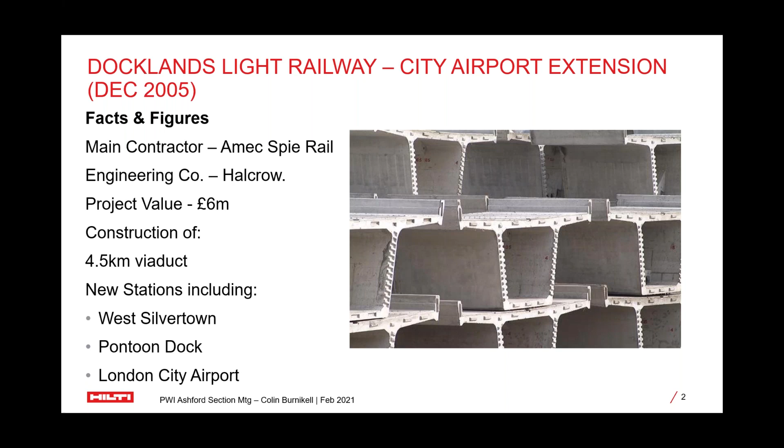So the site was in Dock Road, which is in Canning Town. So if anyone's familiar with East London, you'll probably recognise some of the landscape there. But this wasn't just purely an office setup, and in that image, in the background, you can see those blue buildings. That was the actual office, but also they had a factory set up on site. And this enabled them to manufacture the various concrete products that would be required for this particular project, the primary one being, obviously, the viaduct.

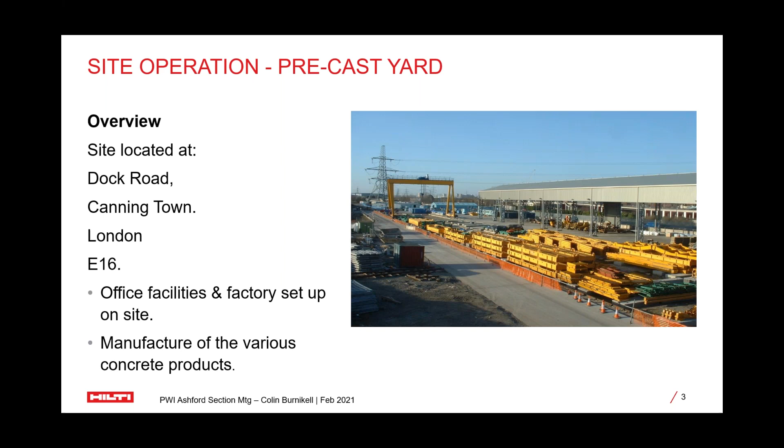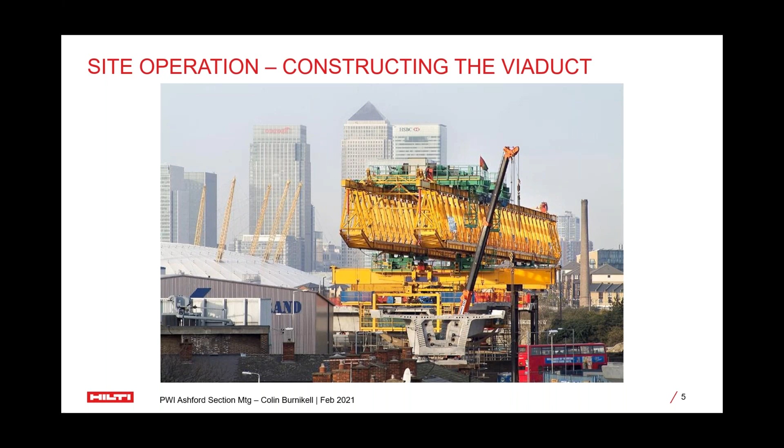So if we have a look at the civil engineering element, the construction of the viaduct, as I said earlier, the viaduct pieces were made on site, and then they were moved and transported around site using the following methods. So you can see the image on the left-hand side.

The viaduct, once the elements were constructed, were left to cure, and once they were fully cured, they could then be assembled. And what was interesting to note was the alignment. So as each segment went along the route, it was aligned specifically to the previous part of the viaduct, therefore ensuring it was an exact fit.

The other thing to bear in mind, of course, as well, was services. Now, in the past, you may have seen bridges with services either hanging off the side or fastened to the side. But in this instance, it was decided that the cables and services would actually be within the structure itself. And that image on the right-hand side, you can see some of the cable penetrations actually in situ there.

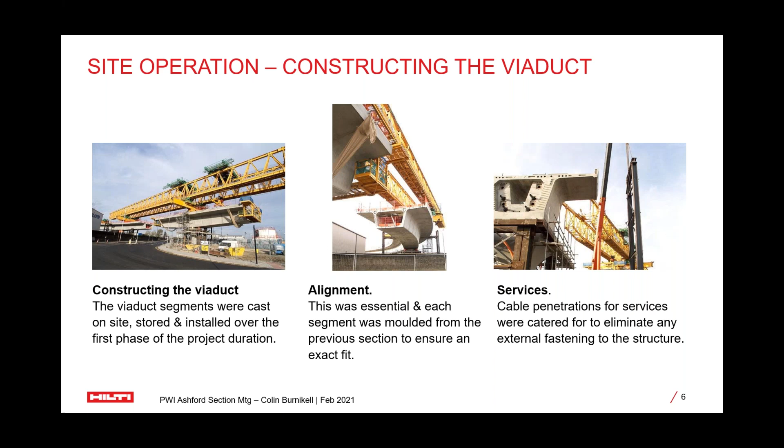So this is the main entrance to the site. This was the first part of the viaduct as it was coming off the transition slab. And again, you can see the Portakabins there in the background.

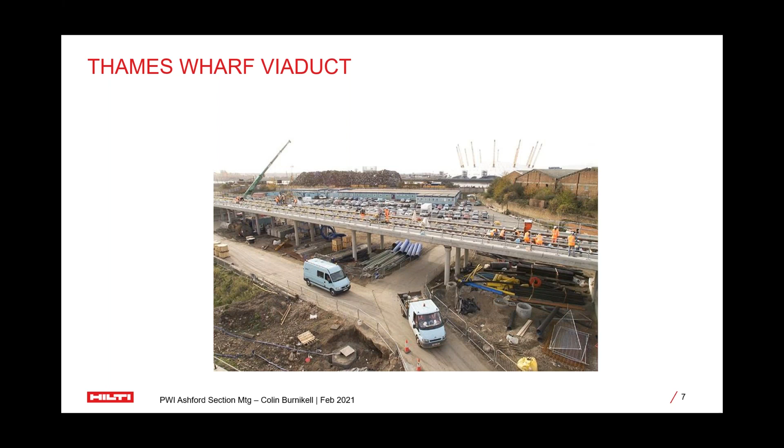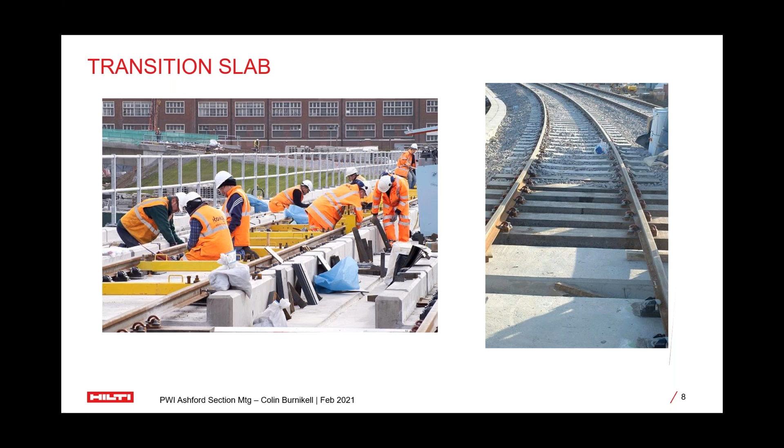So the transition slab. So the route came out of Canning Town. So the image on the left where you see the green netting, as the route swung round on that curve, obviously that's your traditional ballasted track, and then it transitioned into the poured concrete slab. And there on the image on the right hand side, you can see there's some timber sleepers, and then ultimately the concrete slab itself.

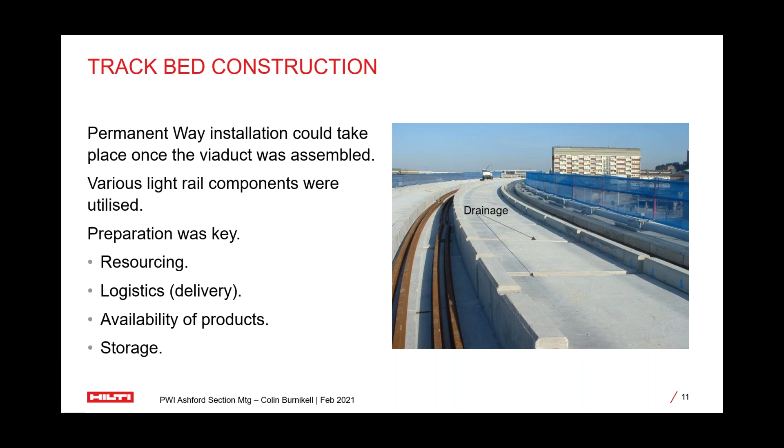So for preparing the track bed, a grout pad was going to be used, and you'll see more of that in a while. But to ensure there was an excellent bond between the concrete and the grout, obviously the concrete base had to be scabbled. And this, although quite a manual process, was quite efficient and very effective at what it was designed to do.

And if you look at the chap standing at the back there, he has a shroud around, if you like, the footprint of where the grout pad's going to go. And this enabled it to contain the precise locations for these base plates where the grout pads are going to be.

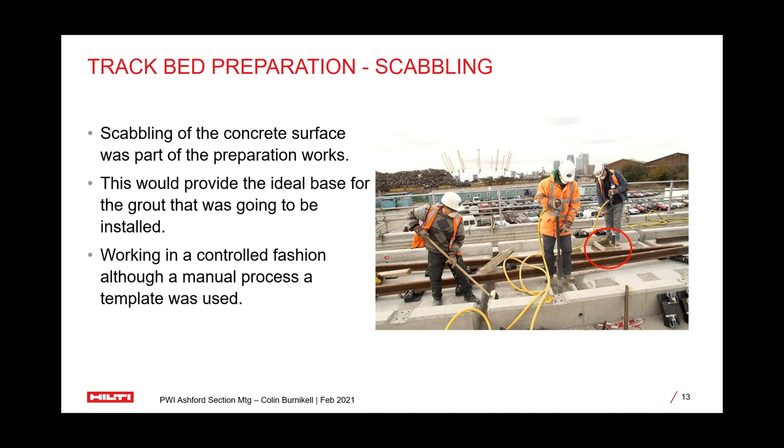So now if we look at the track bed, we now have a scabbled viaduct where the base plates are going to sit. And this is a curve just going out on the first part of the route itself. On the right-hand side of the picture, you can see the other road as well. So this is obviously a twin track.

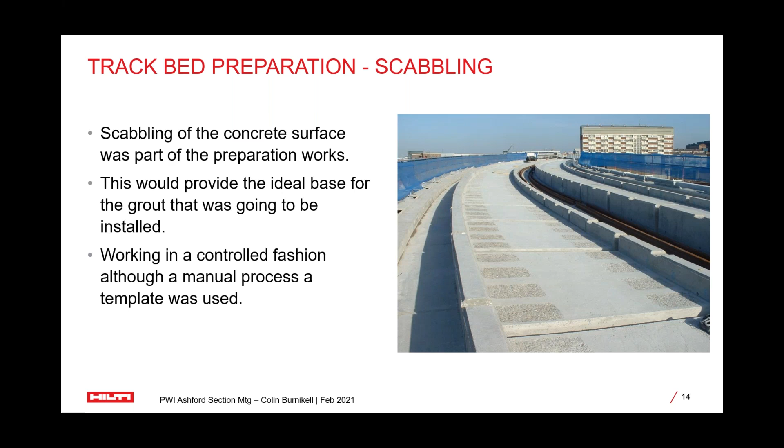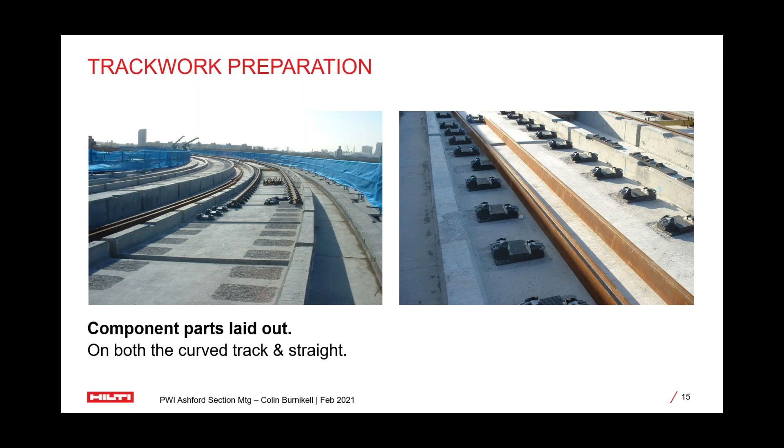So the next part of the project was obviously to start laying out the component parts. So as you can see here, we've got the track work laid out, and we have the appropriate base plates. And on the right-hand side, that's the same situation using standard 80-pound rail on the Vipa base plates. Then the gauge was set up, so obviously it was all aligned correctly, and then the next phase of the construction could begin.

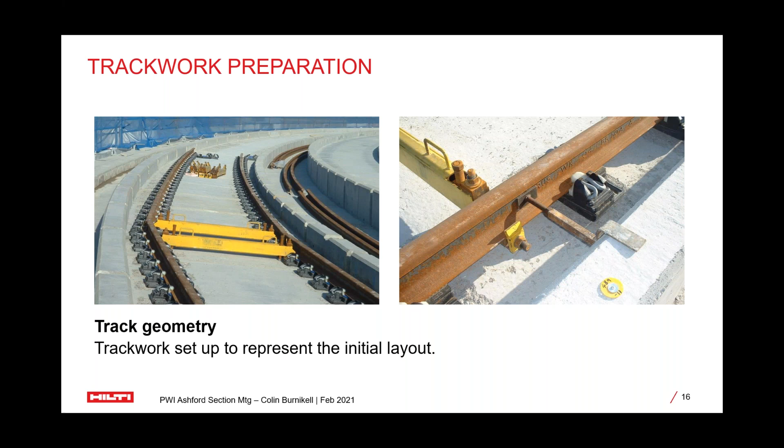For this particular project, for the plain line, the Vipa base plate was the base plate of choice. This was specified by Halcrow, and as you can see in the image, it's pure and simple, a 2-hole base plate. It also incorporates the fast clip, which obviously makes removal of the base plate, should it be needed, quite easy to achieve. And the middle image clearly shows you the base plates, simply suspended off the rail, how they'll overlie the scabbled concrete where the grout bed is going to go.

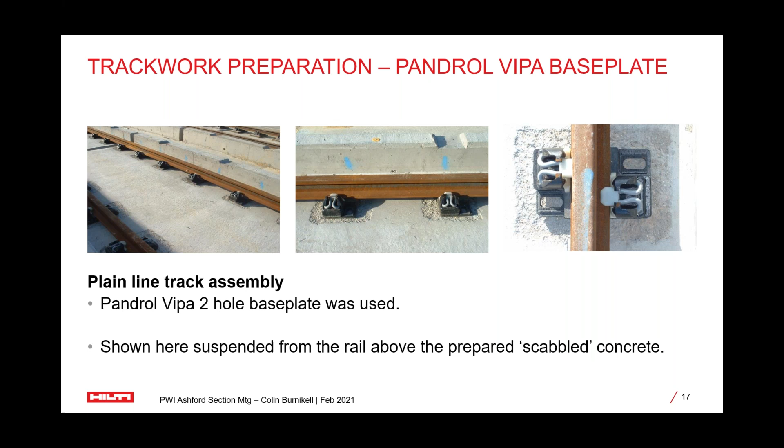So we've now obviously established that the track work was in situ, but a number of things had gone on in the past prior to this, and that was to ensure what anchor or fastening was going to be used. So there were various tests and trials that went on prior to any installation work, and this goes back probably 3, 4, 5 months prior to the track work being constructed. And there was some criteria.

The anchors had to achieve 70 kilonewtons, and there was a wide array of different fixings that were going to be tested. It was decided a chemical anchor was the preferred choice, and a male anchor at that, not a female, not a socket. The initial trials were quite wide and varying, if I'm honest, and a number of the chemical anchors actually failed, and it was the bond between the anchor and the concrete that had failed, so it just literally popped out.

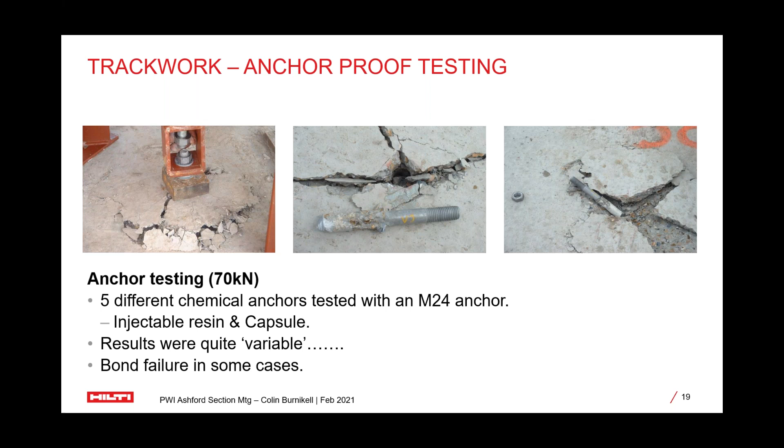As part of those trials, we, as in Hilti, were also involved, and we had 2 chemical anchors that were being tested. One was a resin capsule, and the other one was our injectable resin, our RE500, which is quite unique in itself, and it has a pinkish colour. So from an installation point of view, you can see if our resin has been used, but equally you can see at the top of the anchor, you want to make sure you've got enough resin in the hole.

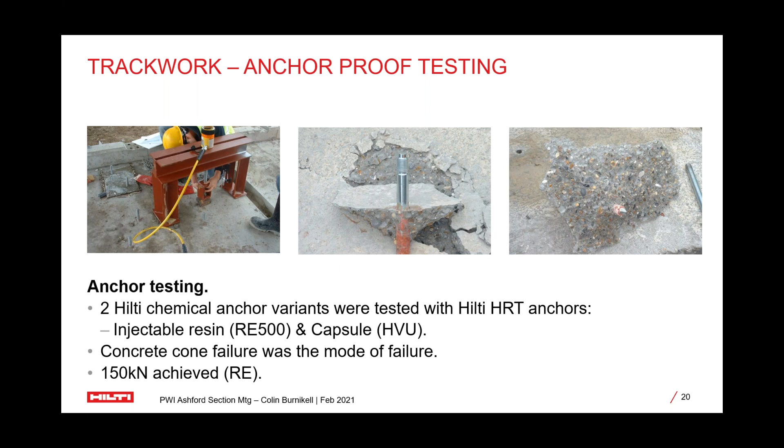And when this was tested, we found that it was actually the concrete that was failing, not the anchor. And as you can see there, we doubled the loads that were expected, with 150 kilonewtons in shear. Now, we were also asked at the same time, what about potential workmanship issues? So as part of this testing, we drilled out some holes and filled them with standing water.

So if the construction work was going on in the winter months, which it was, and there was a sudden downpour and the holes got full with rainwater, what would be the impact of using our resin in this particular scenario? So we drilled a number of 28mm holes. We installed our RE500 resin, and then we placed our M24 anchors. And once the resin had cured, we went back and tested these, and once again they passed the minimum 70 kilonewton load, and the image on the right gives you an example.

So we were fairly confident that this particular resin would be suitable because it's actually used in underwater applications as well. And this was one of the reasons why both the designer and the construction organisation, AMEC, were keen not only to use this, but to have some sort of documented evidence to prove the suitability of this anchor.

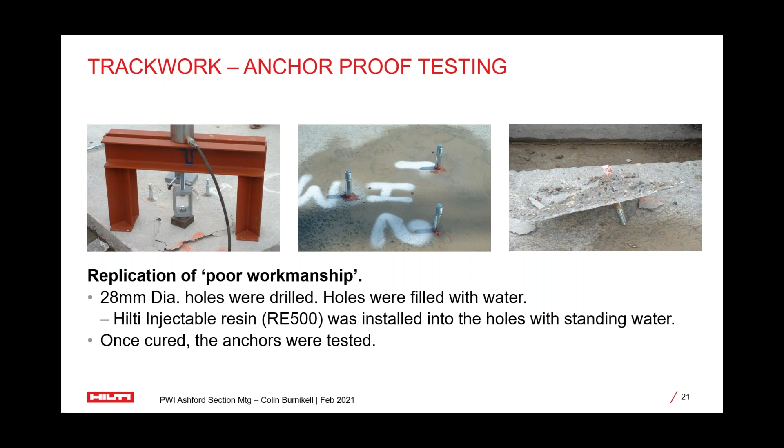So to supplement the tests we've done on site, we also provided some of our internal test data, and a fair challenge came back: do you have any external independent test reports? So we had some Technical University Munich reports specifically on our resin and our anchors, and this was overseen by Josef Eisenmann. So if anyone is familiar with this chap, I think he's since retired, but he was quite a recognised name within the industry.

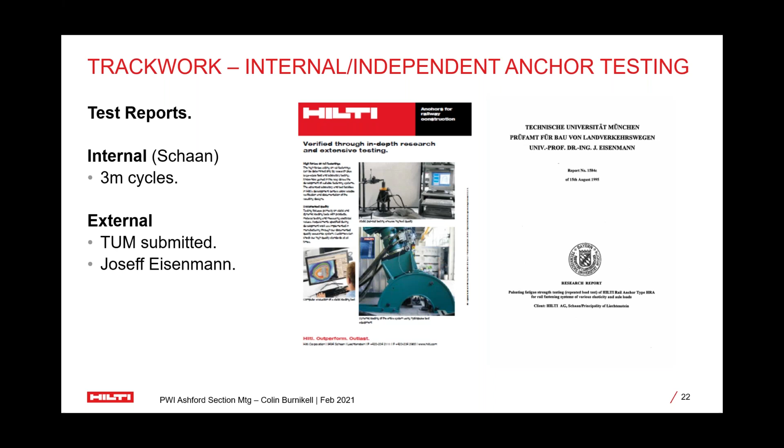So that was all submitted, and the anchor part of it was firmed up and confirmed that the Hilti RE500 would indeed be the preferred resin for this particular extension. Now, with any chemical anchor, it's a prerequisite to ensure the holes are clean, dry, and dust-free. And we have an example here showing the image on the right-hand side. The guys are simply just running with an industrial hoover, just clearing out the holes to make sure that they are in tip-top condition.

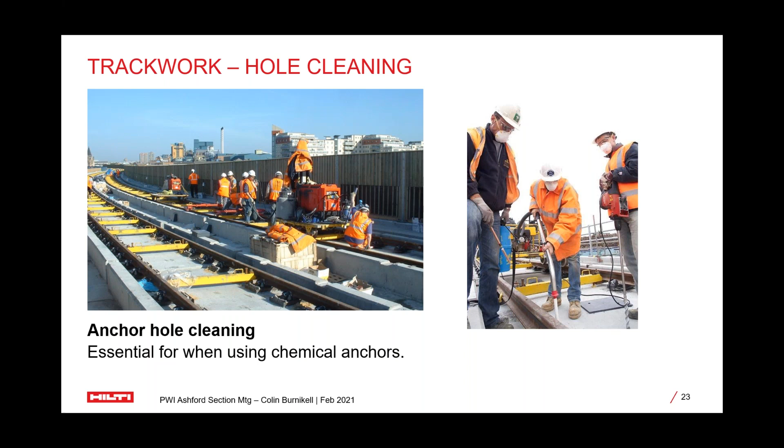So we've established the anchor that was going to be used, but obviously for the anchor to perform, there was a requirement to drill a hole, and therefore there were some drilling trials. So once again, we got involved with a number of different alternatives, and these range from diamond drilling, rig mounted, we had percussive handheld, and we also had a drilling wagon where you could mount a percussive drill on it as well. The initial interest on the diamond drills was the ability with the base plate you have in the images on the left and the middle. This has the ability to suck itself as a vacuum base plate to the concrete slab.

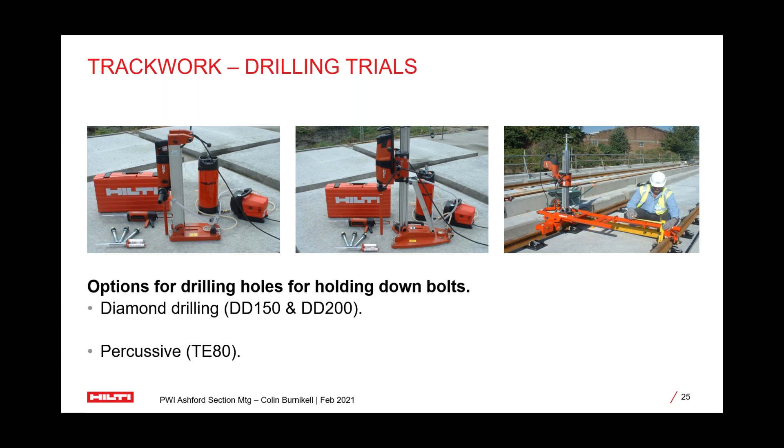It would also ensure the holes would be perpendicular to the slab, and it was decided, however, that a percussive method would be the preferred choice because, pure and simple, it was quicker. So the drilling wagon was the preferred choice. This enabled a Hilti TE80 percussion drill to be mounted on the side. So if you look at the image on the right-hand side, you can see the chap there drilling, and it's used as a pillar drill. So you're not actually holding the drilling machine as such, you're just simply feeding it down.

To ensure that the holes weren't over drilled, there was a depth stop attached to the side of the column of the drilling rig. So this had two benefits. Obviously, the first one is you're not going to drill an over deep hole, but also you want to consistently be able to apply the same amount of resin to ensure that the anchor is installed correctly. So yes, obviously it prevents over drilling, but also ties in with minimising any resin wastage.

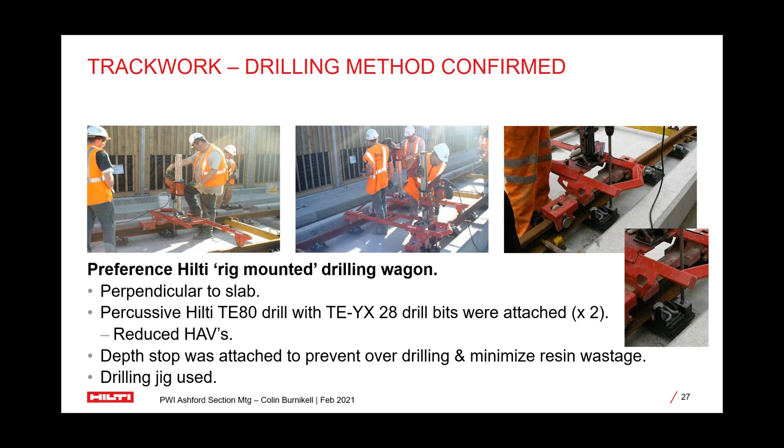So we've established that the drilling machine of choice was percussive, and also off the back of that, it will be rig mounted. The client was also keen to establish, with regard to hand-arm vibration, what sort of results could be achieved. So once again, we went down to site. We met up with one of the teams, and we set up our vibration equipment, which was top equipment back in the day, but you'll remember this was 2004. And we done a number of trials over an afternoon, and we got a vibration figure of 7 meters per second squared. So this gives AMEC the peace of mind knowing the sort of vibration figures that could be expected, and therefore cater with their staff, whether it was rotating it or limiting the exposure to an individual.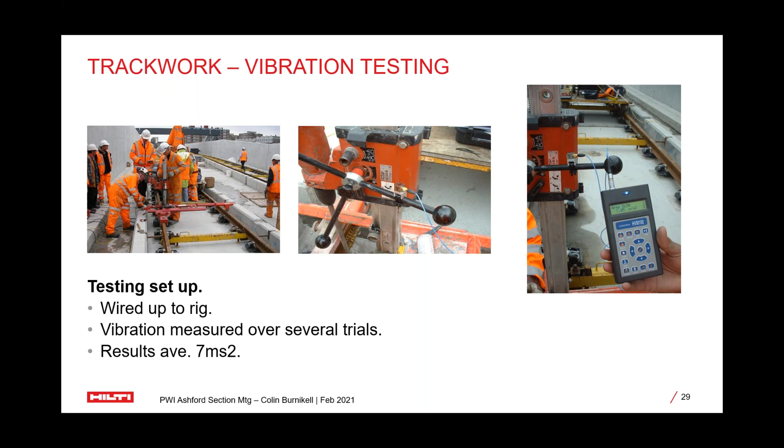So, trackwork installation. So we've established how they're going to drill the holes. We know the resin that was going to be used, which was the Hilti RE500 injectable resin. And the rods that were decided, it wasn't a Hilti product, it was a standard M24 threaded bar. It was threaded top and bottom with a blank section in the middle. So the logic behind this would prevent any wear in the base plate as the traffic passes over the rail

Now, we were drilling typically 125mm deep embedment. So simply by standing to the side and putting the trigger on the dispenser, the operative can see the piston plug actually advancing towards the top of the hole. So once the piston plug gets to the right depth, you can then obviously stop, remove the piston plug from the hole and the hose, and move it to the next hole. Now that could be a little bit hit and miss.

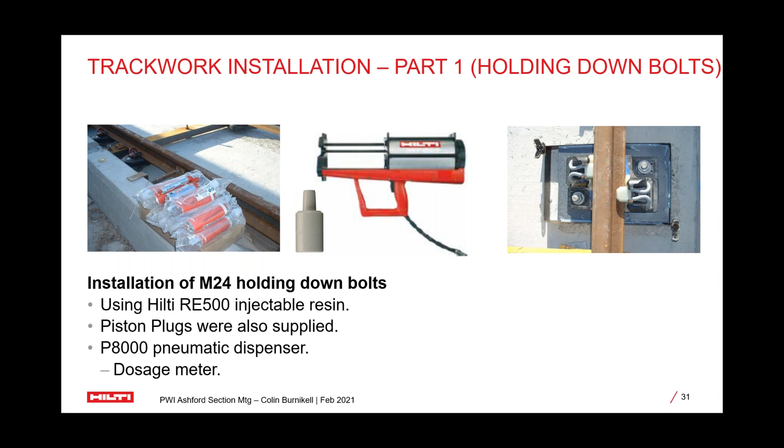The last image on the right-hand side, so here we have 2 of the hot dip galv bolts installed, and you'll notice around the edge there's like a metal bracketry, and this was to tie in and restrict the grout when that went in. So the bolts went in first, and then the grout went in. What grout was used? Well, this was an SBD product, the Epoxy Plus.

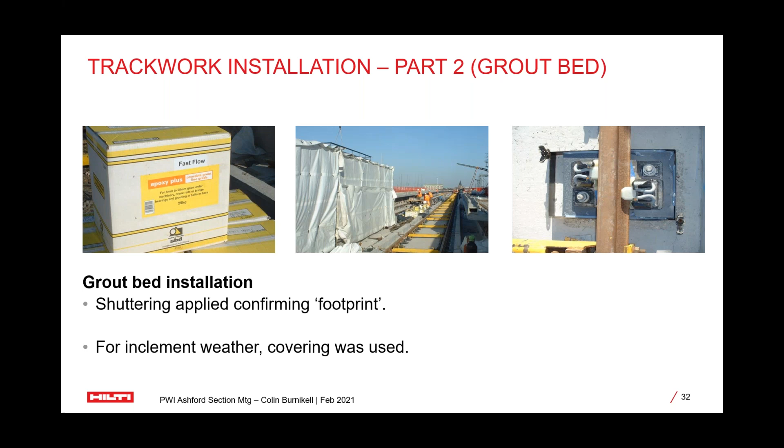So the idea was, again, you've got to remember this was probably March, April time, so potentially the weather could be a little bit inclement. So catering for this sort of situation, the guys had a marquee that was quite manoeuvrable along the track, so where they were working, if it was required, it could simply just be slid over the top. This was either as part of the installation process when they're assembling the grout pads, or maybe whilst it's curing.

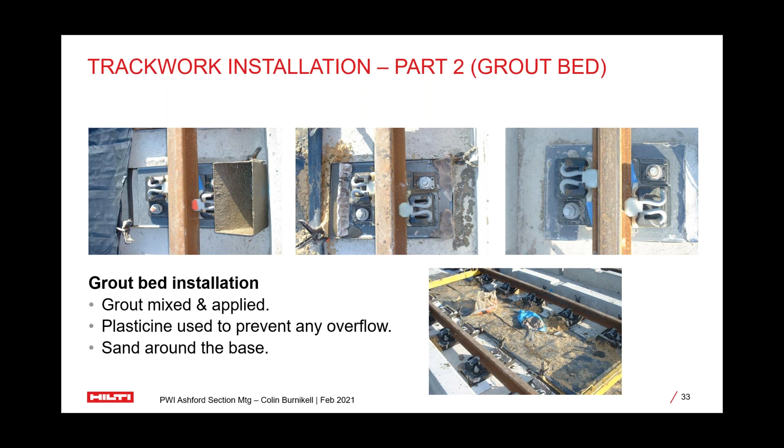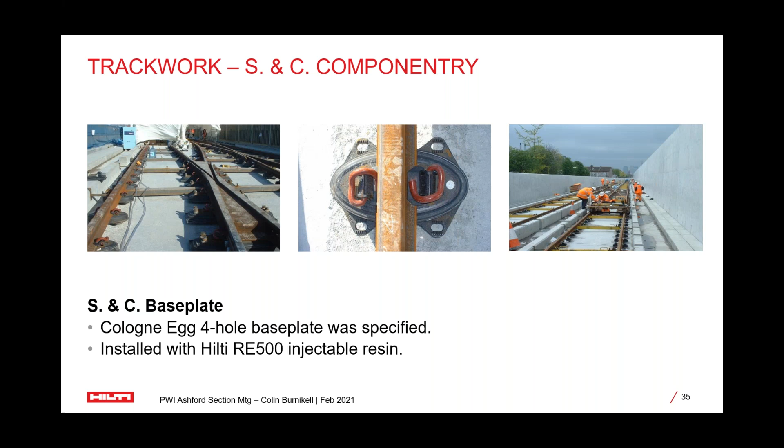Now there's some other bits and pieces of track work that were required. On the S&C, the specification was for a 4-hole base plate, and this was actually the Cologne Egg. And I must confess, this was the first time I'd come across this, but the designers, that's what they recommended, that's what was going to go in. And as you can quite clearly see, it's a 4-hole plate, but once again, the Hilti RE500 resin was the anchor of choice.

The other part of the track work, of course, being DLR, is the third rail. So the third rail was part of the concrete cast segments of the viaducts. A number of plastic internally threaded sockets were cast in these recesses.

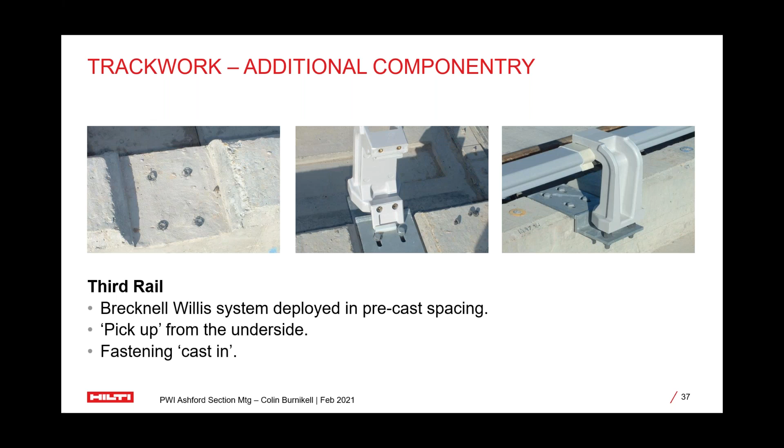Part of our support package with AMEC was we would test a number of anchors on their behalf should they need it. They liked the idea of some anchor testing to go ahead, however they preferred an external source to do this. There was something in the region of 30,000 anchors that went in, and they decided that 5% would be tested in pure pull-out tensile, with an independent company going to do that on their behalf.

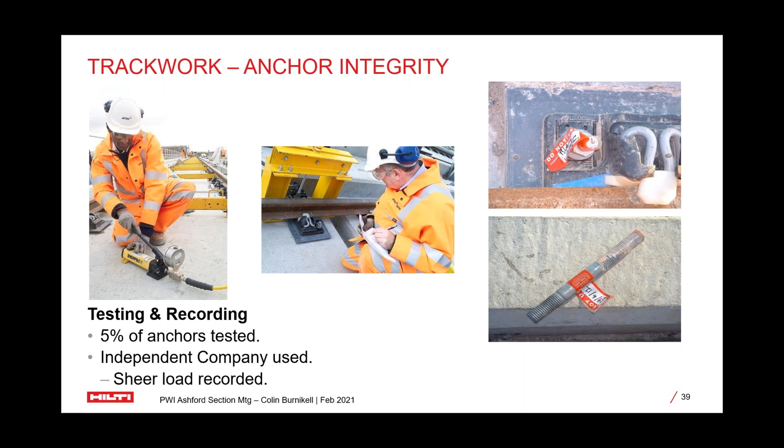It was a fairly minimal load that they were testing to, and I can count on one hand, something like 4 anchors failed out of the hundreds that were tested. All they done, they simply marked those up - you can see the images on the right - and they were removed by unclipping the base plate, sliding it along, then simply overcoring, removing, and reinstating. So this proved how good the resin was. It's very tolerant of conditions, and the resin itself actually permeates through the concrete, so it provides an excellent bond.

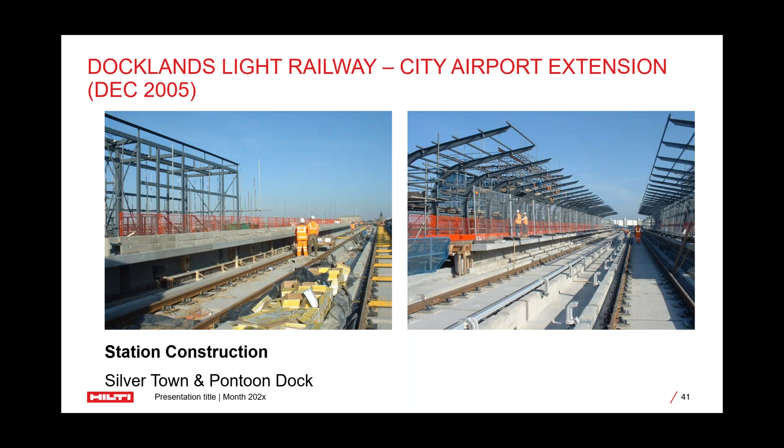Just to plug a couple of gaps, obviously this presentation was severely geared around the track work itself, but I just wanted to share with you some imagery showing some of the stations being built. This slide shows a fairly consistent model that was replicated on these stations going along the route - we have Silvertown on the left and Pontoon Dock on the right. I'll be honest, I didn't have too much involvement with this, it was more the track work that I had involvement with.

So in summary, here's some details with regard to the components that were used. As you can see, it was an 80-pound rail, which is standard for DLR. For the plain line, the Pandrol Vipa plate, and then the Cologne Egg was used on the S&C. The drilling wagons, along with our TE80 percussive drilling machines and their 28mm drill bits. It's also interesting to note with the drill bits, they needed to be slightly longer because the drilling machine was mounted higher up rather than being handheld, so we provided longer drill bits as well. Then we have our resin, the RE500, the M24 hot dip gal grade 8.8 high tensile bolts that was sourced, I believe, with the base plates as well. The grout was an SBD product, and Brecknell Willis's bracketry was used on the third rail.